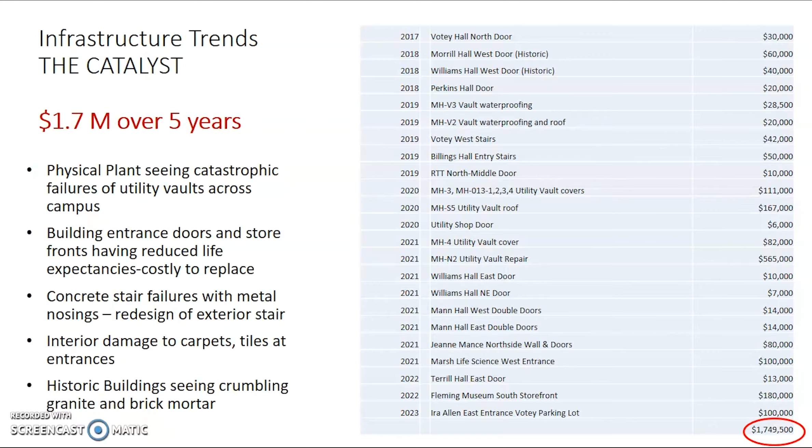We know from the New Hampshire Department of Transportation that salt has been used on roads to lower the freezing point of water and therefore minimize the formation of ice on roads and other surfaces since the early 1940s. The challenge is that when we put salt, which is sodium chloride, on the roads, it can run off and have impacts on the environment.

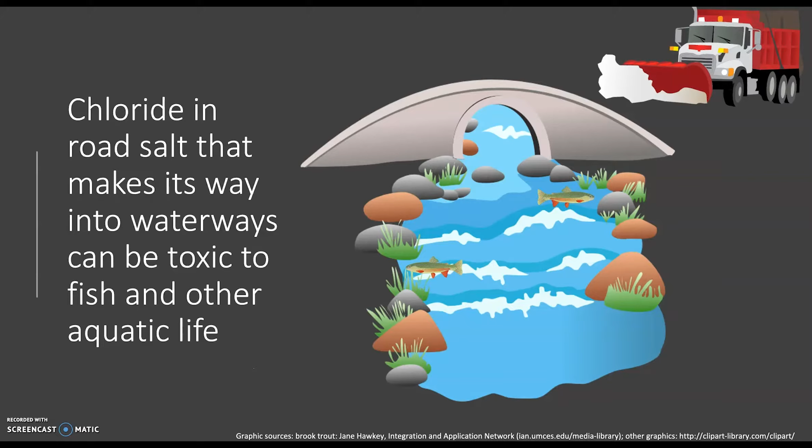For instance, if sodium chloride gets into surface water bodies, it can actually reduce the reproduction ability of fish or other aquatic life, and it can also kill them at certain higher levels.

We also know that chloride entering lakes can affect natural lake processes. It's going to sit on the bottom because that salt is more dense than the fresh water, and it can inhibit normal cycling or mixing of the lake.

Here in the Lake Champlain Basin, we know from research from the AuSable River Association, from Brendan Wiltse, that Mirror Lake in Lake Placid has been salted because of that urban community. The salt actually runs down into the bottom of the lake and forms a salt wedge at the bottom, which is rich in chloride, low in oxygen, and that means the fish stay up above.

In a normal spring situation, mixing would happen from top to bottom. When the ice is going out, there would be enrichment of oxygen again to the bottom waters. However, what Brendan has found is that because of the salt wedge at the bottom, full mixing of the lake doesn't happen, and that means low oxygen levels stay at the bottom and the fish therefore stay higher up.

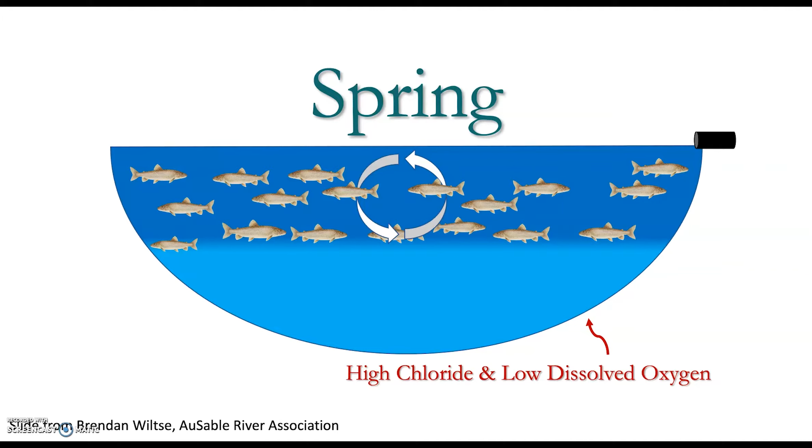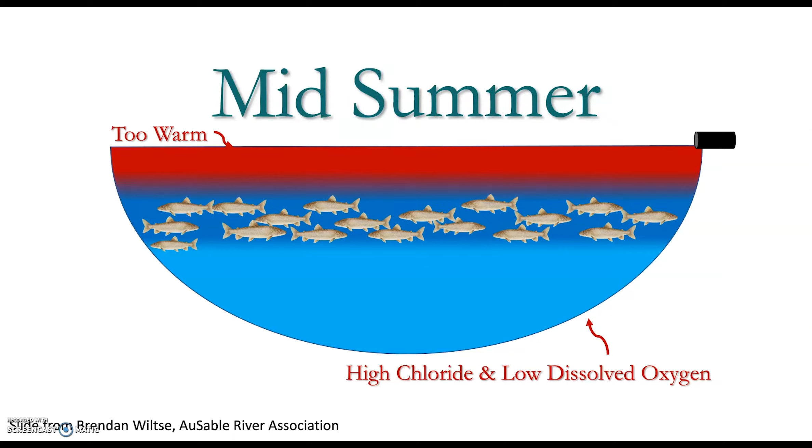This is okay until you get to summer, when the top waters start to get very warm, and warm waters hold less oxygen than cold waters. As the summer goes on, the fish are squeezed more and more into a narrow band of the lake, again as a result of the salt having been put there in the winter.

Other impacts of salt on the environment include running off into roadside areas and killing vegetation, as can be seen here.

Salt also can move its way into the soil. It can change the microbes that are in the soil, which can change how permeable or how much water that soil is able to hold. It also can cause the release of any toxic metals that might be in the soil, possibly as a result of cars or other inputs from the roadways.

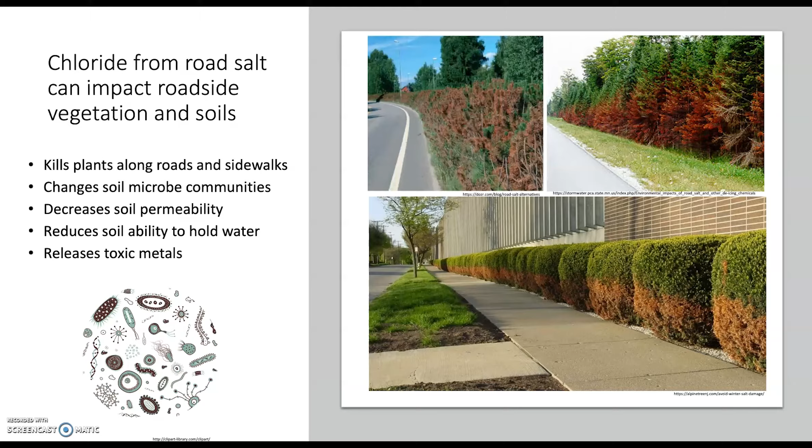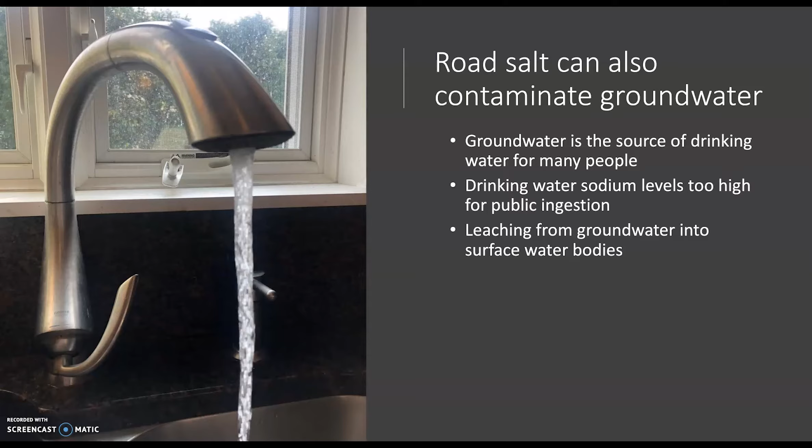Salt also can get into groundwater, and a number of people are using groundwater as drinking water. In this area, we know that there have been contaminated wells, and sodium chloride is our road salt, so the sodium levels can be impactful to people who have high blood pressure or other dietary restrictions or health concerns. Having groundwater contamination is a challenge.

In the Lake Champlain watershed, the area that drains into Lake Champlain, we know that chloride has been increasing for at least the last decade. On this graph from the Lake Champlain Basin Program, we see chloride on the vertical axis and time on the horizontal axis, and you can see that from about 2011 or so, we've seen increasing concentrations of chloride in the lake.

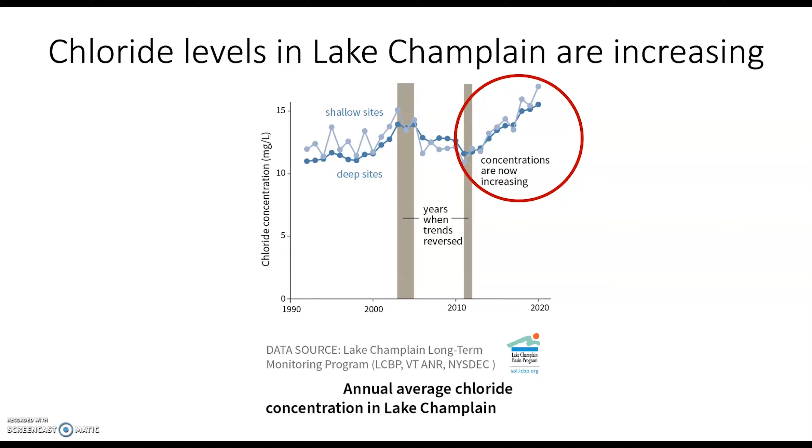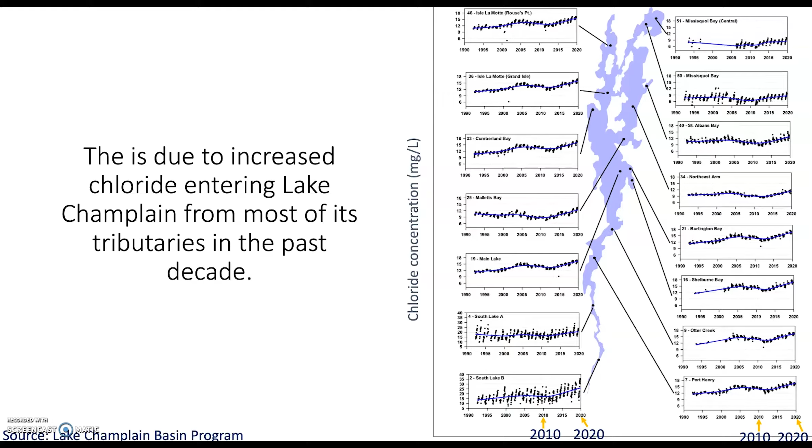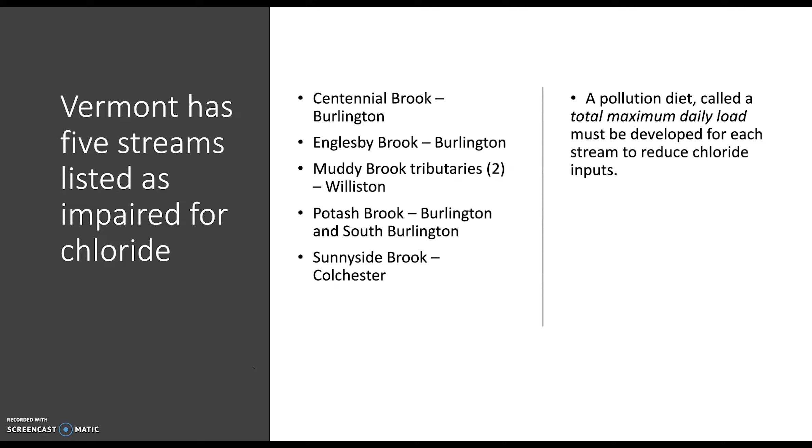We know that Vermont has 5 streams listed as impaired for chloride, meaning those streams need what's called a total maximum daily load, or pollution diet, to determine how we will reduce chloride entering those water bodies to protect them and the aquatic life within them, as well as human connections through drinking water. Most or all of these streams are within the Burlington area, and 2 of the streams drain parts of the UVM campus.

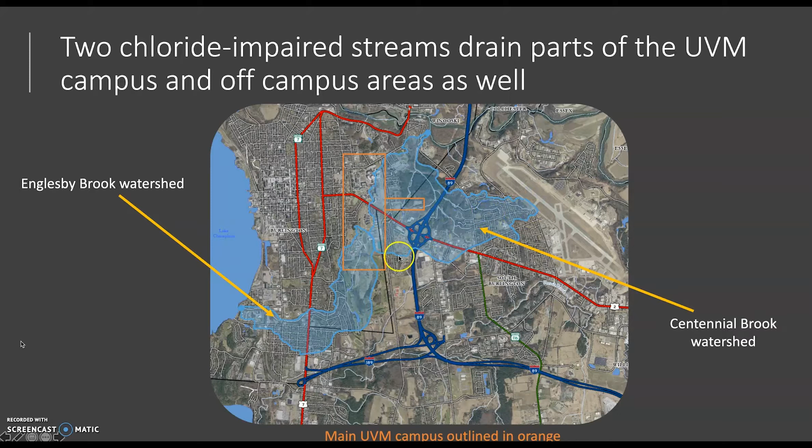Englesby Brook drains the southern end of campus, shown in the orange rectangle on this map, and Centennial Brook Watershed drains the eastern part of the campus. But I want to point out that campus is not the only contributor to these streams, and therefore not the only contributor to the chloride concentrations being observed. For instance, in Centennial Brook Watershed, I-89 runs through that watershed, a main thoroughfare into the city of Burlington. We also have the edge of the airport at the headwaters of that stream. So UVM is one of the contributors, but not the only contributor.

I'm going to talk to you about the financial impact of salt application as it relates to our buildings. As you saw from the previous slides, there are dollar figures associated with the costs of implementing projects. Now I'll show you the physical pictures associated with what those costs look like.

The University of Vermont is a large campus located in Burlington, Vermont. Prior to COVID, we had a budget of about $16 million for deferred maintenance. But with all the budget reductions during the pandemic, we are currently budgeted at about $6 million in deferred maintenance, which is not a lot when there are so many buildings and funds shared for things like roof replacements, mechanical systems, electrical upgrades, and life safety upgrades.

It really hurts to use these limited funds to make repairs that result from salt damage. We would prefer to build a project that will have a 15 to 30 year life. The above-ground building items that tend to be the most costly are the entrances, the storefronts, stairs, metal doors and frames, and masonry.

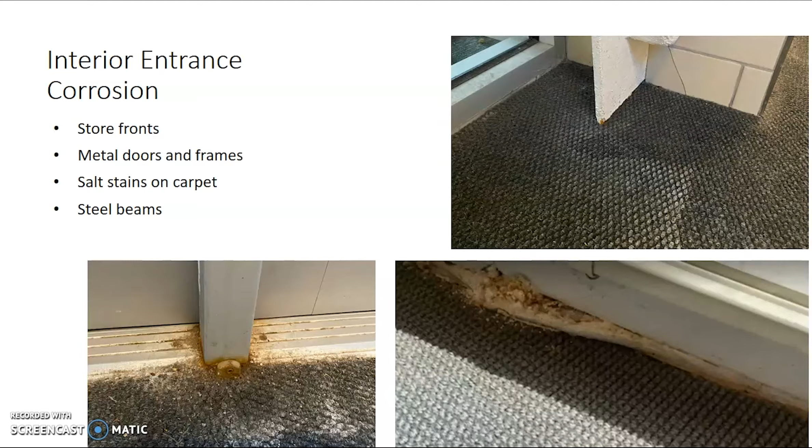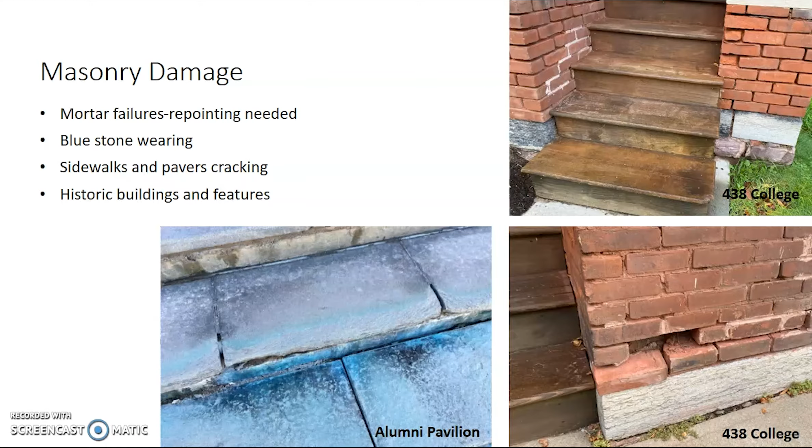The pictures really tell the story of the damage we see from salt. This area is the entrance to our new central dining facility, turned over to us in 2017. We are seeing corrosion on steel beams, mullions, and just about everywhere the carpet abuts the metal. Notice how quickly the damage begins to happen. But it's not just the metals where we see damage—many locations across campus also have failing mortar and stone on projects less than 10 years old.

We have a lot of historic buildings across campus as well. This is our Williams Hall, which I show in larger photos for reference, but then narrow into the granite pillars at the entrance. Notice the disintegration happening to the pillars due to the salting of the entryways. Our hope is that we can find sealants or maintenance strategies to eliminate further degradation.

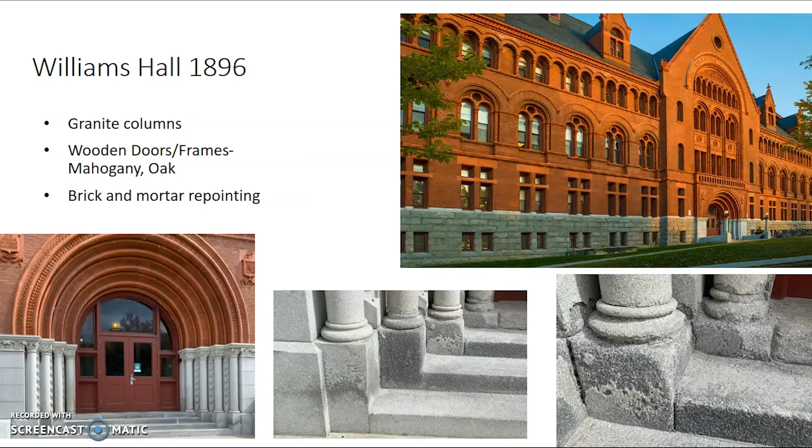Our doors are another obvious area of failures due to salt, and you'll notice it's only the bottom 12 inches of the frames and doors showing this rust and corrosion, again indicating this is a salt problem.

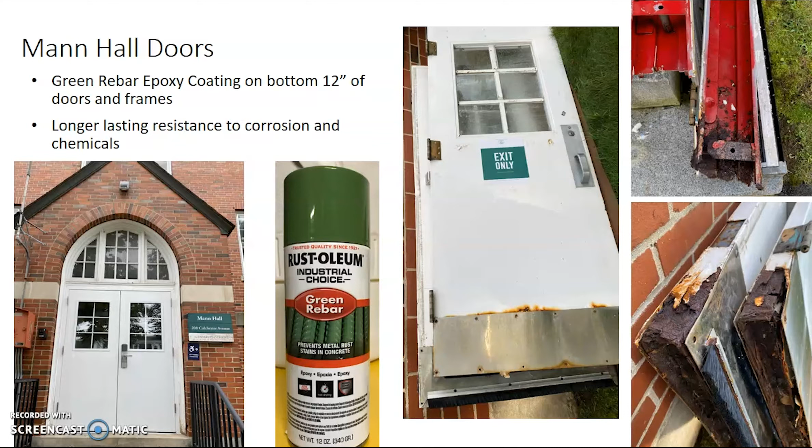This is a picture of our Mann Hall doors recently replaced. These are newly installed, but you can see the rusted areas of the old doors. Our latest approach is to coat the bottom 12 inches of the doors and frames with a Rust-Oleum product that is an epoxy-based primer.

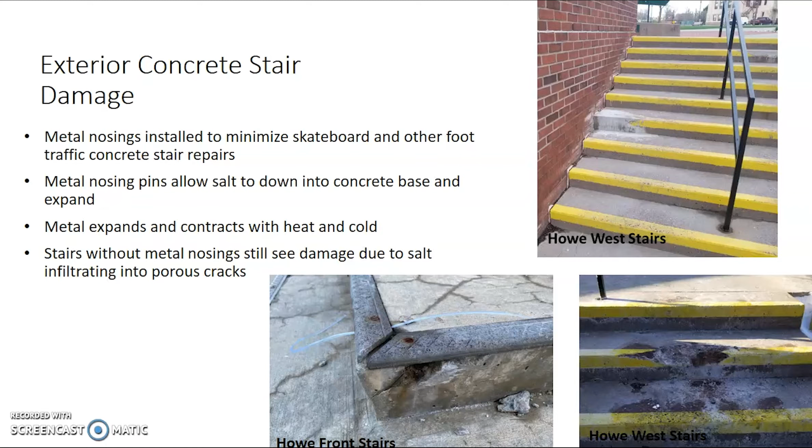For above ground issues, our stairs see the most damage. The university's original design included a metal nosing, but due to freeze-thaw cycles, expansion-contraction of metals, and salt usage, the failures of these nosings are significant, and to date we have not found an easy repair. Our new stairs have gone back to previous designs without the nosings, but salt still finds its way into the concrete and reacts with the rebar. We are planning to include maintenance for sidewalk and stair sealant.

The previous slide showed the Howe stairs before construction. Now completed, these stairs incorporated our new design, eliminating nosings. We are hopeful that designs mitigating salt damage, better products, and more comprehensive maintenance techniques, coupled with technology changes and more innovative approaches, are on the horizon.

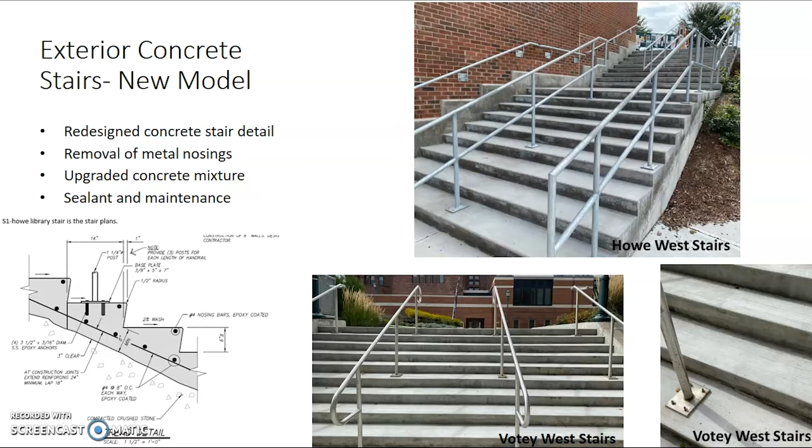Hello, my name is Kevin Sweeney and I'm a project coordinator with the university. I work a lot on the underground utility systems, and in particular I want to talk about our utility vaults and some of the salt penetration issues we're seeing with those vaults.

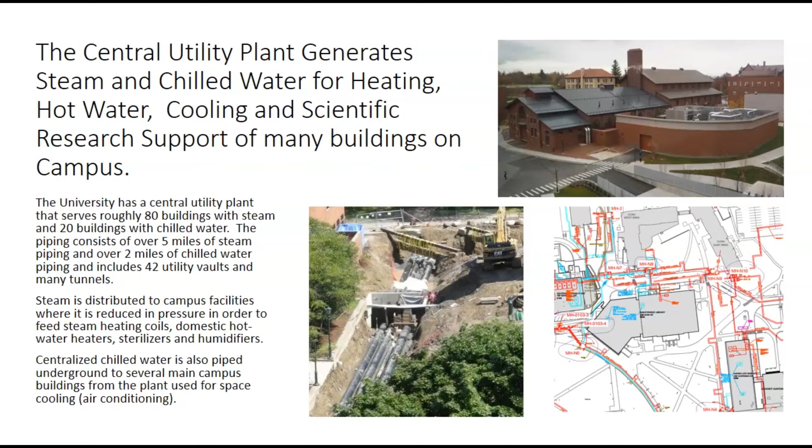For some background, we have a central utility plant that serves over 80 buildings with steam and 20 buildings with chilled water for heating and air conditioning systems. We have over 5 miles of underground steam piping and over 2 miles of chilled water piping throughout campus, and 42 utility vaults which house valve work, trap assemblies, and other equipment that maintain that distribution.

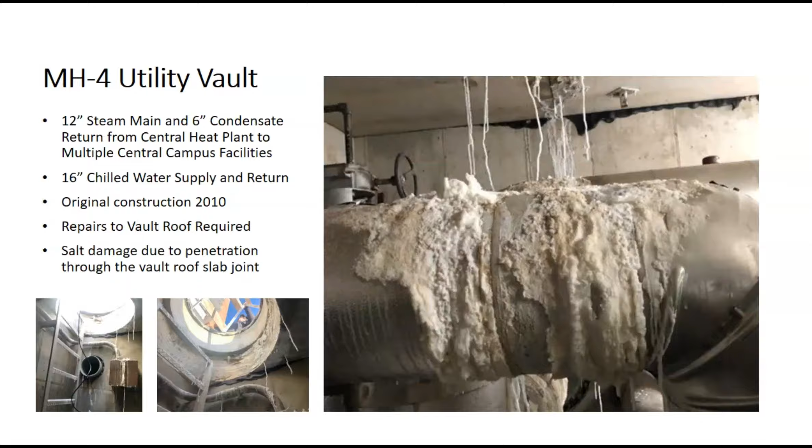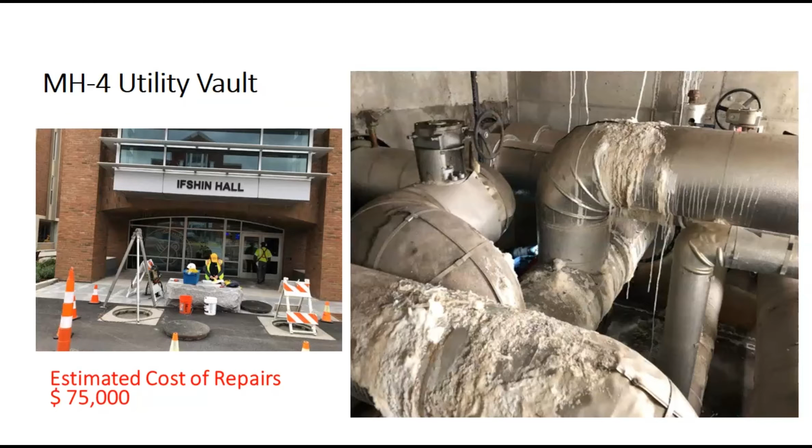Over the years, we've seen more significant salt penetration issues into our utility vaults. This is a photo of utility vault MH4, which supplies steam and chilled water to Central Campus. This has salt penetration through the roof seam as well as the manway, and has accumulation of salt anywhere from the steam jacketing to the carbon steel piping, the floor, and some of the electrical components inside the vault. This has some challenges with construction as it's located in a major roadway, and would need to have the roof slabs replaced and re-waterproofed.

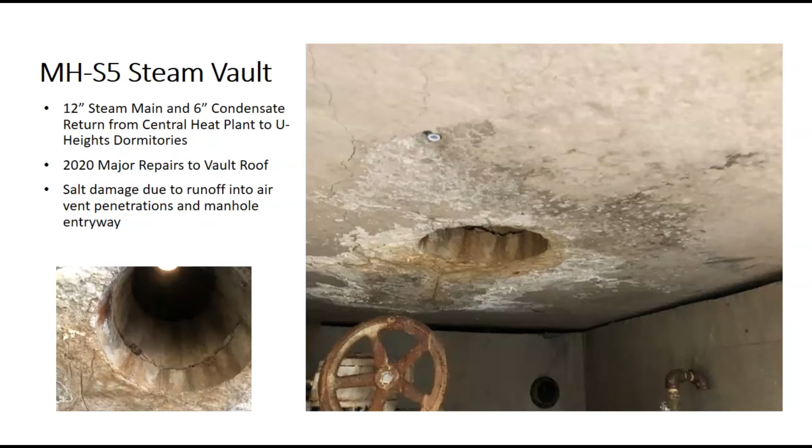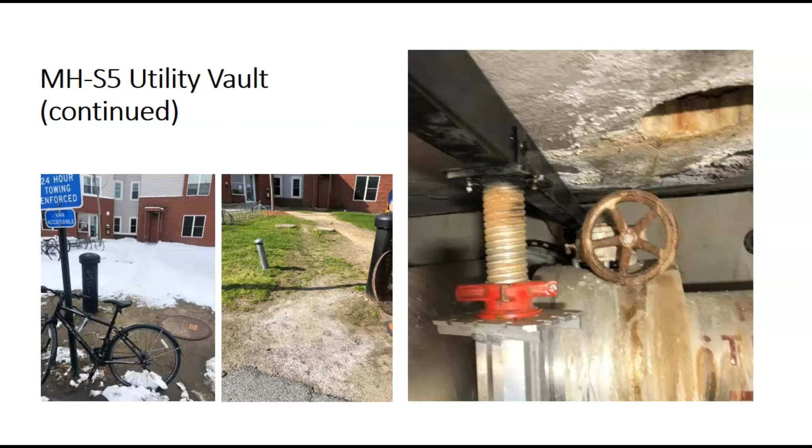Last year we noticed concrete spalling and cracking in MHS5, which is a steam vault that serves steam to one of our major dormitories on campus. After we took that photo, we noticed concrete falling down into the structure and worked with some of our local engineering consultants to come up with temporary shoring until we could make repairs to the vault. We ended up increasing the elevation and bringing the vents above grade so that runoff would not be an issue into the vault, and then waterproofing the vault itself.

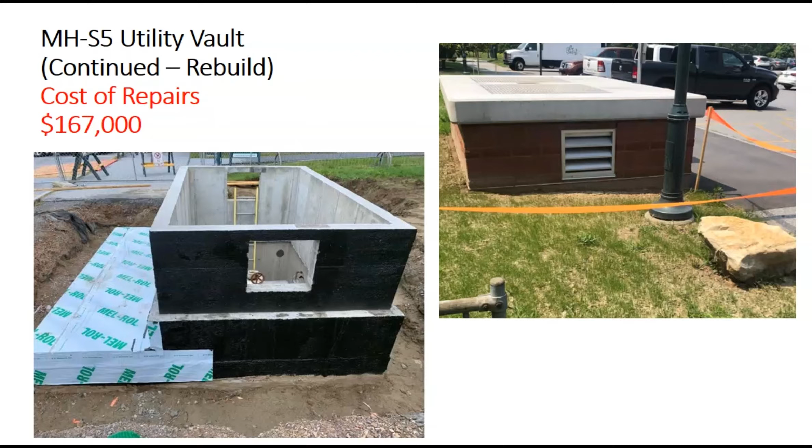All for a cost of over $167,000. We are currently under construction on our MH-N2 utility vault repair project.

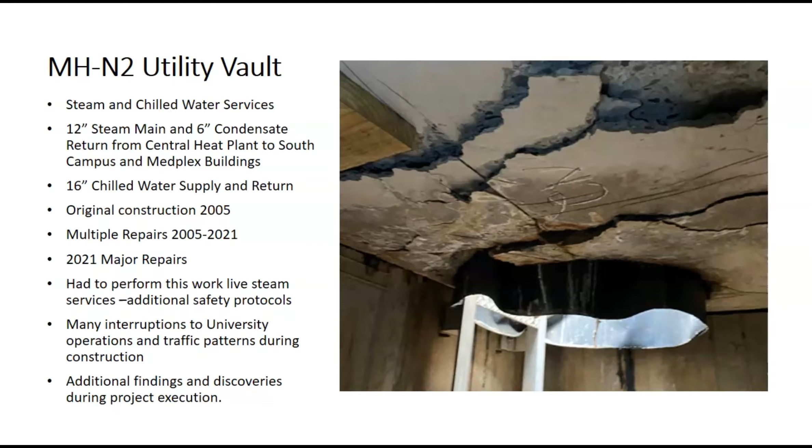This vault had significant spalling of concrete in the roof structure, which was located underneath the manway and a sidewalk above. After we noticed the spalling concrete, we used temporary supports and shoring to buy us time to seek engineering consultants and get project specifications and drawings completed for the repair.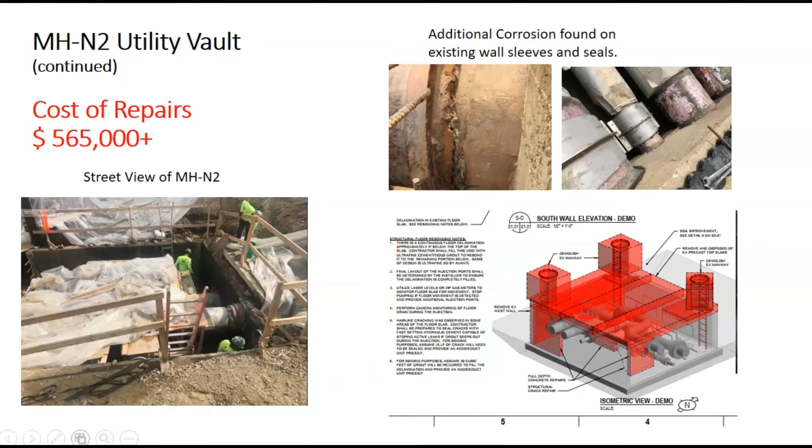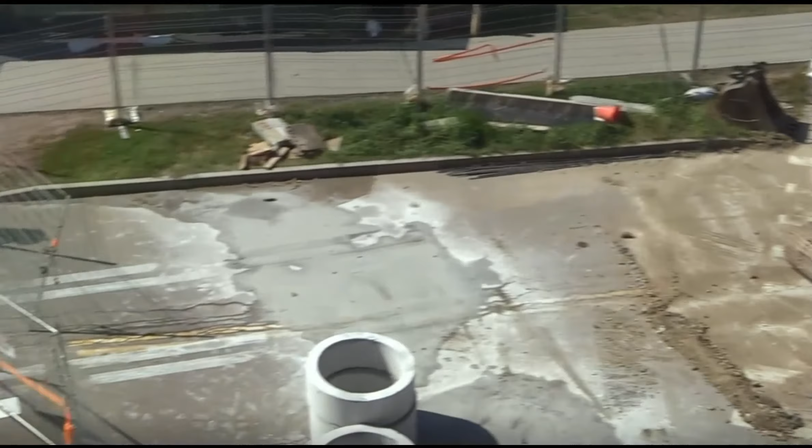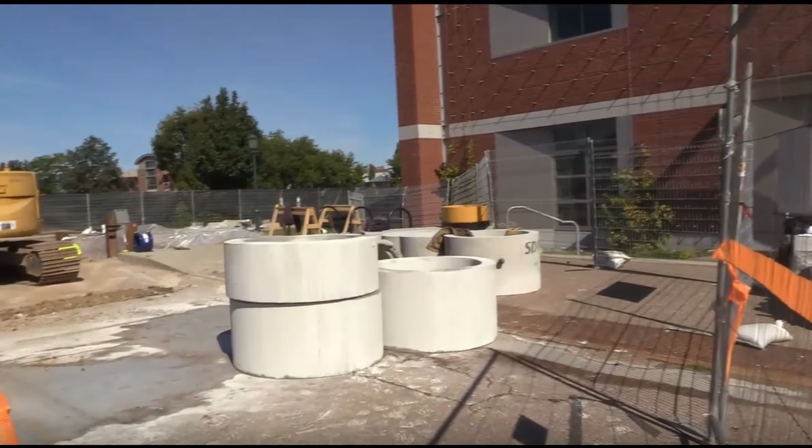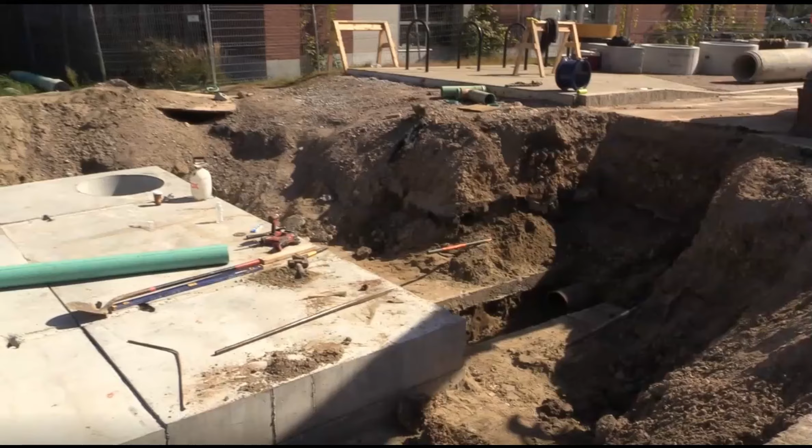The utility vault MHN2 repair project had a number of different challenges, from pedestrian access and minimizing blockading walkways, to emergency vehicle response access ways and conducting modeling for turning radiuses, to logistical challenges with removed access to loading docks, trash removal, and other delivery points on campus.

Another challenge was working with live steam. This is one of 42 utility vaults on campus and is really the hub between North and South Campus, so it's one of the most critical vaults on campus.

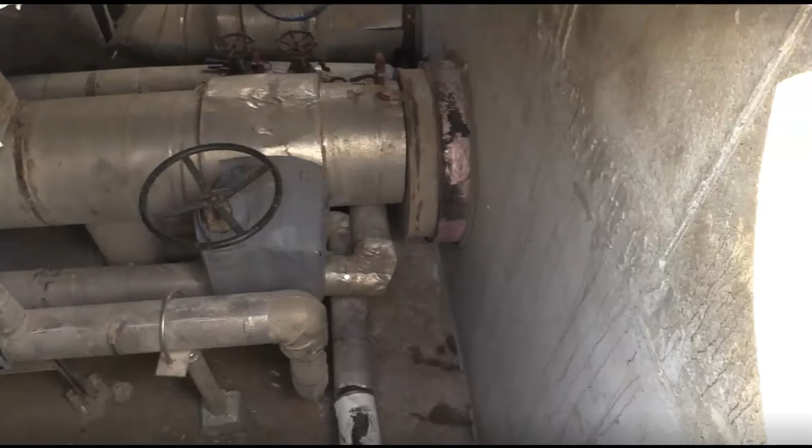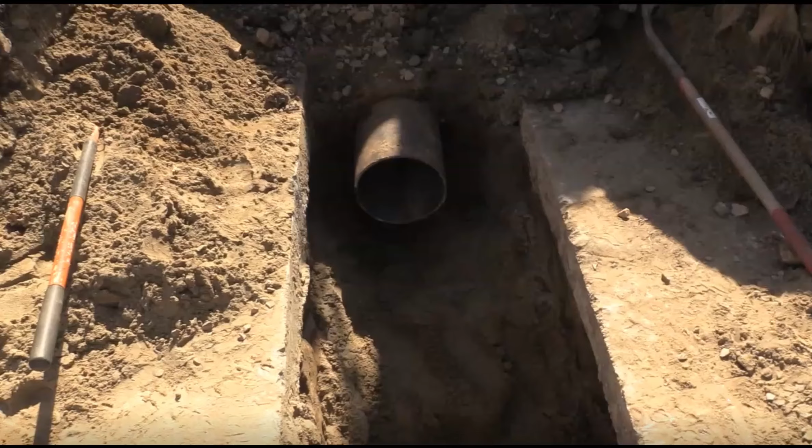Isolating the utilities prior to the project would be detrimental to the HVAC and heating systems, both on North and South Campus, so we really needed to keep this live while doing the construction. Access to valve work, maintaining thrust block anchors, and moving of equipment was critical to maintaining the system's operation.

The UVM Custodial Services team consists of 203 full-time employees. We are a very diversified staff with over 10 years experience on average and an average age of over 50 years old. We have 2 Kubotas, a Bobcat with a salter, and 14 snowblowers to service our larger areas. We're on call 24 hours a day during the winter months for a total of 20 weeks. We have no contractors. We service 116 buildings and 373 access egress sites to include porches and patios.

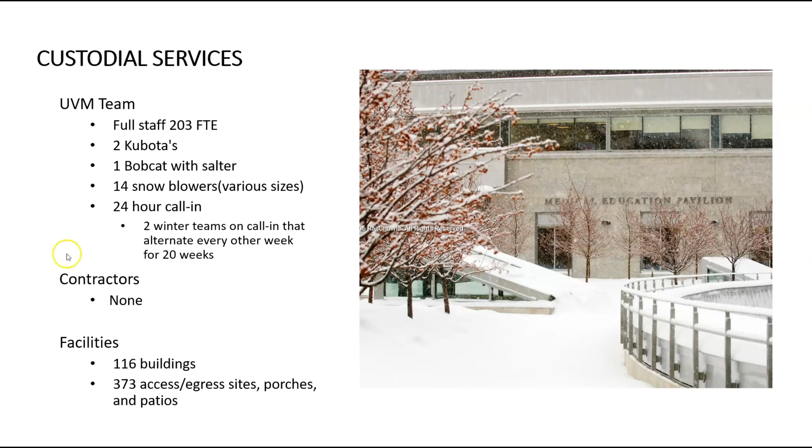Safety drives our response 24/7. Like grounds, we don't have a bare pavement policy. After a major winter event, our goal is to complete the clearing of all access egress points within 72 hours.

Proactively, we apply a de-icer, a potassium formate base. As a pretreatment, we use pump-up sprayers before the storms. This creates a barrier so that ice will not bond to surfaces. It is also meant for light accumulations of snow otherwise. We salt during snow events and during icing events. This is meant for accumulating amounts.

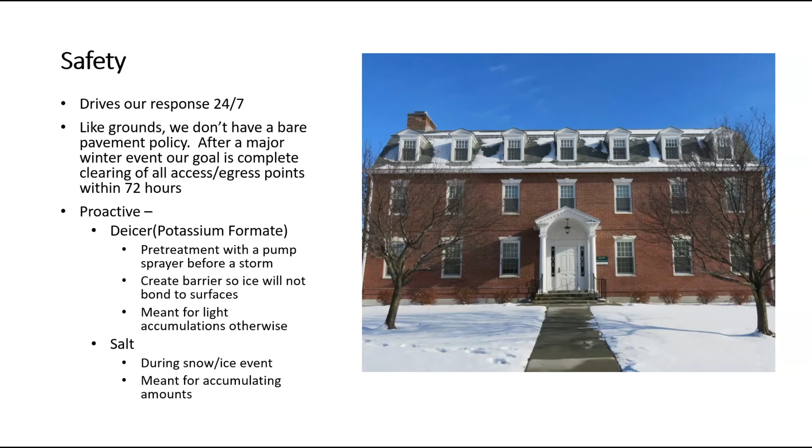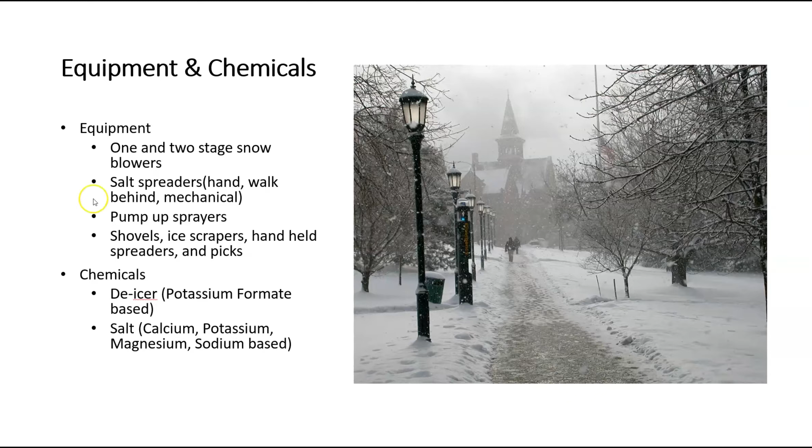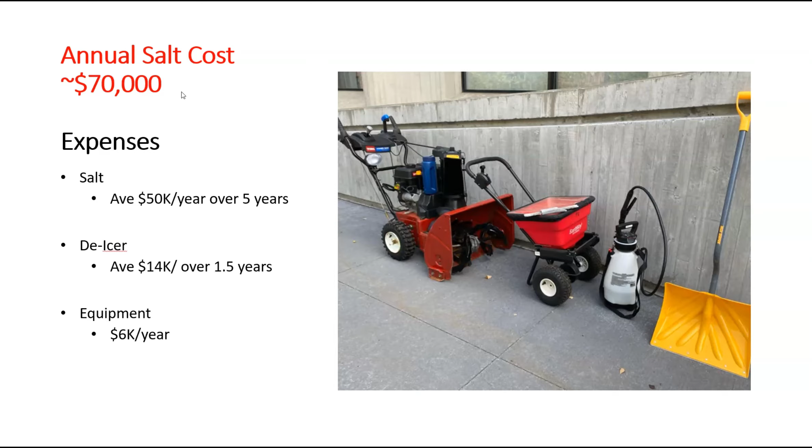Our custodial organization has annual equipment and supply budgeting of about $70,000 a year. We spend this money on salt, which has averaged us about $50,000 a year over 5 years, de-icer, which we've used for a couple of years and averages us $14,000 a year, and equipment, for which we are budgeted $6,000 a year.

Custodial has a variety of equipment for the removal of ice and snow. We have snow blowers, ergonomic shovels of various kinds, broadcast spreaders for salt, handheld spreaders for salt, and pump-up sprayers for the application of pre-treatments to prevent ice buildup. The equipment comes in various shapes and sizes. The idea is we want to make it as safe and easy as possible for our people to remove ice and snow from the facility.

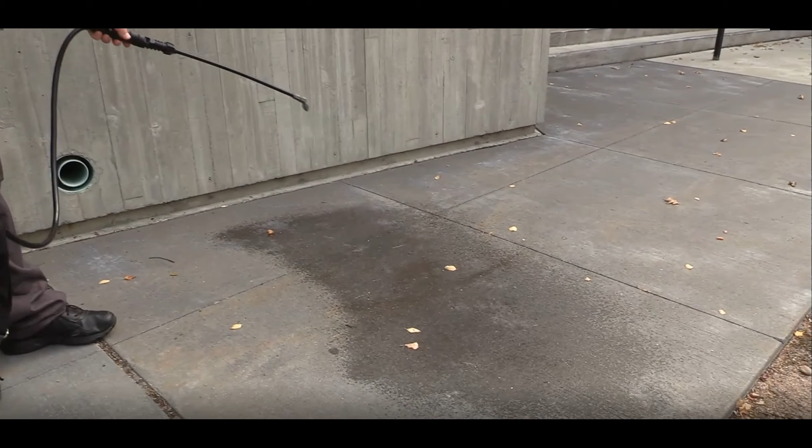The pump-up sprayer for the application of our pre-treat is critical. We began using this a couple of years ago. It's battery operated, it's lightweight, and can be used walking either forwards or backwards. The important thing is you maintain situational awareness. Here we see it in practice. Simply provide a nice, even coating. The concept is to provide a barrier that prevents ice from forming on the surface that you're applying it to.

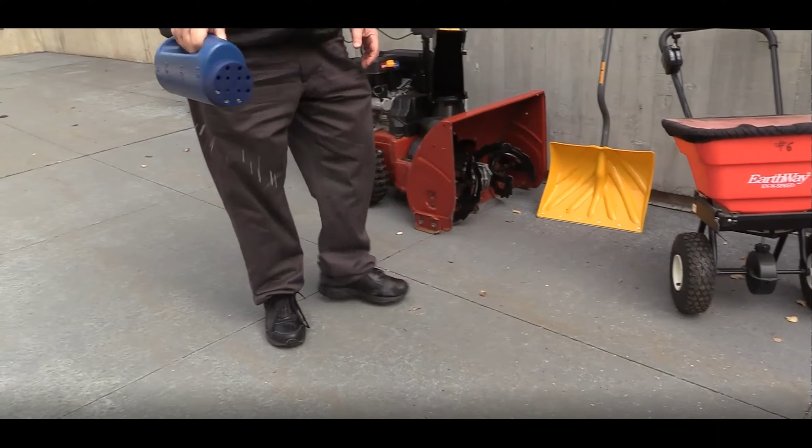The salt spreader, a handheld, is adjustable. Makes it much easier to control the volumes of salt that you're putting down, so you ensure that you're not piling it up. And it's really good around the doorways so that you don't get salt buildup and corrosion.

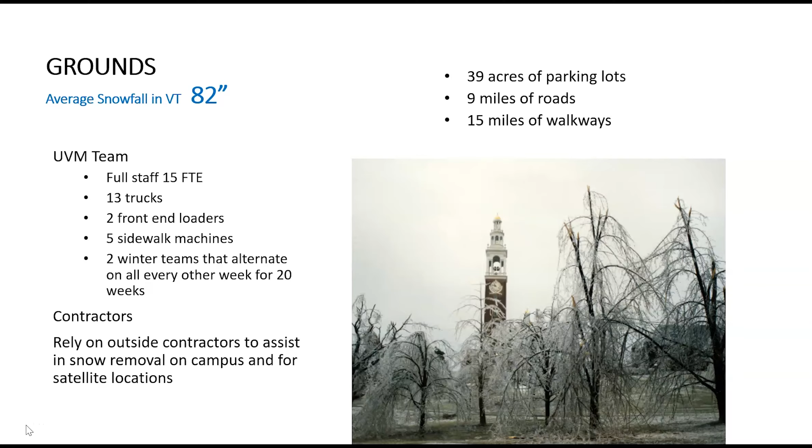As the slide says, safety is our top priority. We don't have a bare pavement policy per se, but have a goal of clearing our hard surfaces to mostly bare in a reasonable amount of time. As I said before, ice events are occurring more frequently in recent years, and this is a challenge for us because ice creates more risk of slip and falls.

We take a proactive approach to fighting storms. We watch the weather forecast carefully and schedule our crews to come in off hours when necessary.

Sometimes these storms coincide with athletic events, which raises our challenge to keep the campus safe, especially given the fact that many of our spectators to sporting events are elderly. We also have to react quickly, such as when we have a warm spell that melts snow onto the road surface only to refreeze in the middle of the night.

When storms are forecasted, we apply anti-icing liquid with magnesium chloride to our hard surfaces. The anti-icing liquid helps to break the molecular bond between the ice and the paved surface, making clearing off of it more efficient. Also, less salt is required.

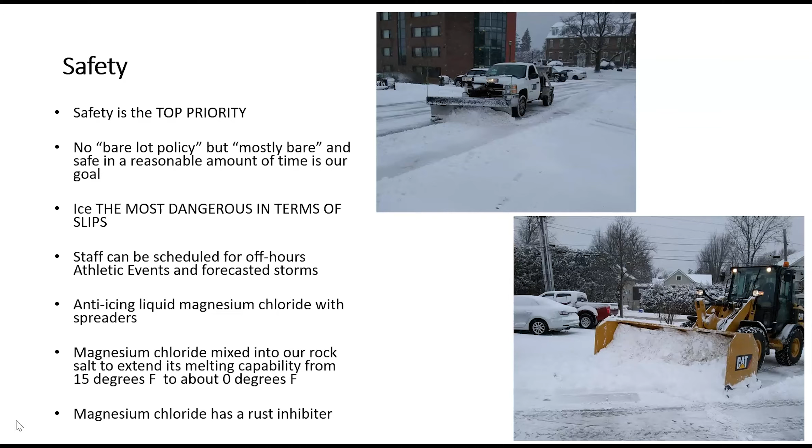Before we began anti-icing, we would have to rely on rock salt to melt the ice. We are confident that anti-icing has reduced the growth rate of our salt use. In addition to ProMelt, we apply a bagged magnesium chloride product to our parking garage instead of rock salt because it is less corrosive to rebar and other steel structural members of the garage.

To combat and reverse the trend of increased salt usage, we have invested in technologies that will help us to reduce and optimize our salt usage. This year, we purchased equipment from Hilltip and took advantage of a grant that is funded by a UVM student fee that the students put in place. The funding allows for student participation to study the equipment and report recommendations.

This year, we purchased a Hilltip truck-mounted combination liquid and solid spreader. It has the capability of spreading rock salt and any liquid de-icer. We also have purchased 2 Hilltip liquid spreaders for our sidewalk machines.

The Hilltip equipment has geo-tracking and the capability to predetermine the flow that is applied to a specific area based on the settings we choose. This helps take the guesswork and personal preferences of the operator out of the equation. However, the equipment operator has the option to blast the area with extra product if it is needed.

We are excited to begin using these products because we believe that it will help us to fine-tune our operations to a degree which we have not been able to do in the past, and it will pay dividends in terms of salt reduction, environmental benefits, and safety.

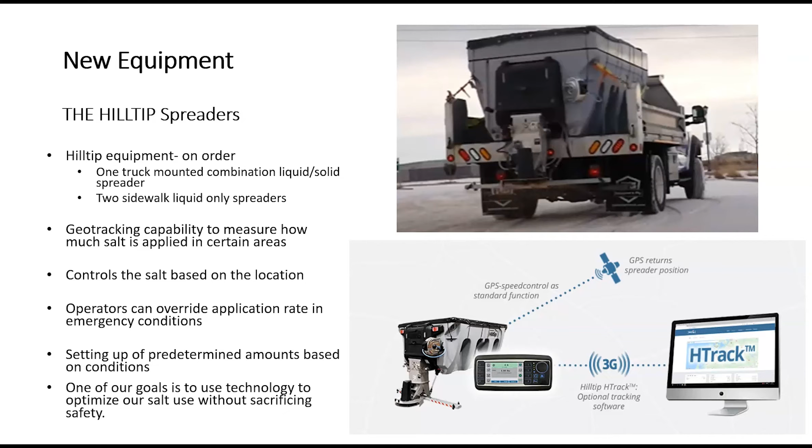Our annual salt use has trended upwards, we believe due to the increase in icing events, and costs us about $200,000 per year. It is one of the reasons, in addition to a desire to reduce impacts on the environment, that we are taking a proactive approach to salt reduction strategies.

We have 3 salt sheds. Each shed holds 300 tons, which when filled allows us to have almost half a season's supply on hand. We built the extra capacity to protect us from salt shortages, which have been a problem in past years.

We have 2 4,500-gallon tanks that we use to store a liquid magnesium chloride product, called ProMelt Ultra 2000 Inhibited, that our staff mixes into the rock salt. As the name suggests, it has a rust inhibitor added to the product. This is the same product that we use for anti-icing, with the exception that the liquid we mix with the salt has a dye added to it.

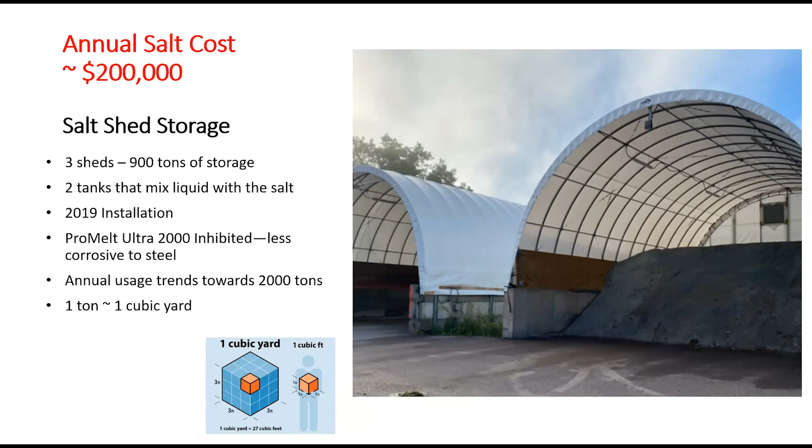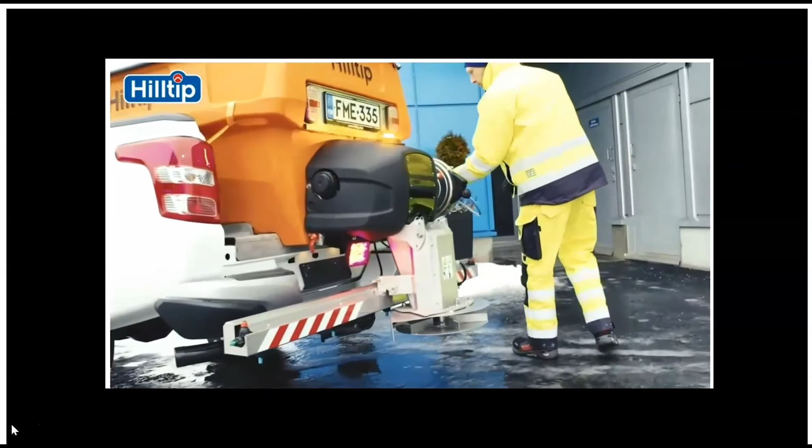Here is a quick video of our truck-mounted Hilltip combination liquid and solid spreader. As you can see, there is a hand sprayer that we can use for entranceways and stairs. Also, the nozzles can be adjusted for conditions such as snow depth. In addition to the capability of the unit to spread either liquid or solid product, it can pre-wet the salt as it flows from the spreader.

In the early 1940s, when salt was first used on New Hampshire roadways, about 5,000 tons of salt were used per year in the U.S. If you fast forward to 2015, about 20 million metric tons of salt were used in the U.S.

So how much is that? First off, there's 2,200 pounds of salt in a metric ton, and if we say each salt truck can hold about 10 tons of salt, that forms a traffic jam of salt trucks from Burlington, Vermont to Seattle, Washington, back to Burlington, Vermont, all the way to Glacier National Park. That's a lot of salt.

Stormwater treatment pond monitoring was necessary for us to quantify the impact of our salt reduction efforts. Our goal was to develop a water quality monitoring program for stormwater treatment ponds in the UVM watershed. This student-led monitoring program allows us to develop a baseline data set for water quality parameters in the UVM campus stormwater treatment ponds before the application of de-icing agents on campus.

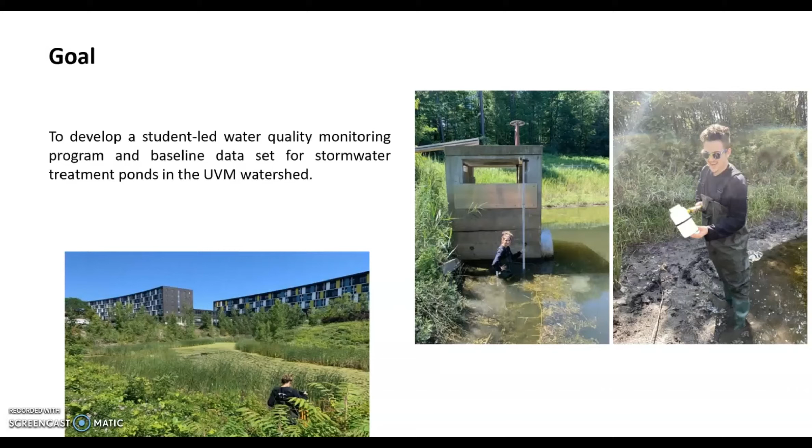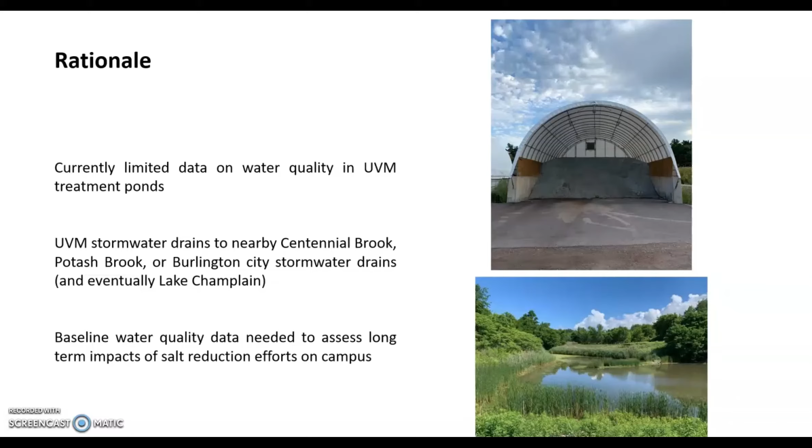The rationale for this part of the project is related to the fact that there is currently limited data on water quality in the UVM stormwater treatment ponds. Extremely high levels of conductivity and chloride have been measured in nearby Centennial Brook, which accepts the portion of water that drains from the retention ponds on campus and then drains to Lake Champlain. We believe that by collecting baseline data on chloride, conductivity, and other basic water quality parameters, we will be able to assess the long-term impacts of salt reduction efforts on campus.

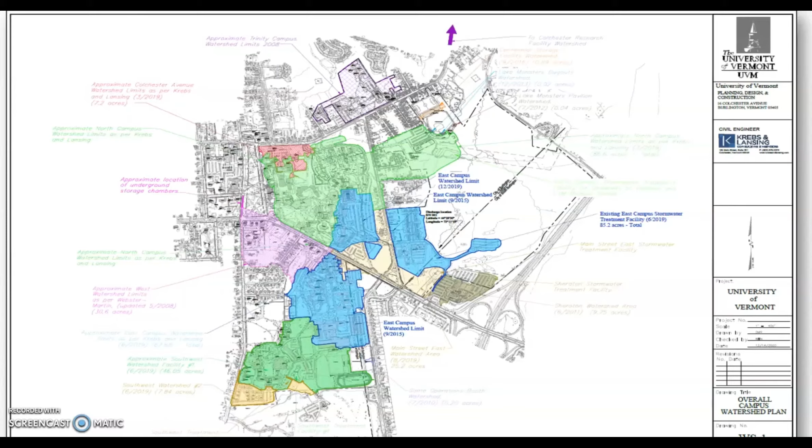A watershed map of UVM campus can be seen here. Our stormwater treatment pond monitoring included 5 of the 7 stormwater treatment facilities fed by UVM campus. Sites examined include Main Street East Stormwater Treatment Facility, East Campus Stormwater Treatment Facility, and North Campus Stormwater Treatment Facility, which feed into Centennial Brook, represented by the red line on the map.

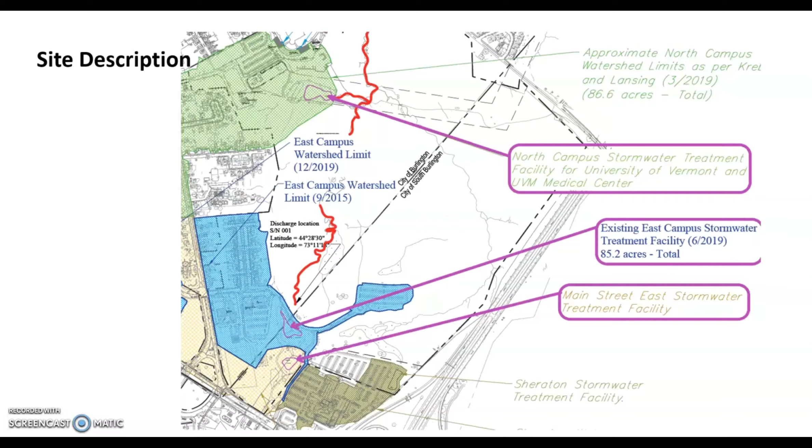Other sites include Southwest Stormwater Treatment Facility Number 1 and Southwest Stormwater Treatment Facility Number 2, which feed into Englesby Brook, which is located slightly south of these treatment facilities.

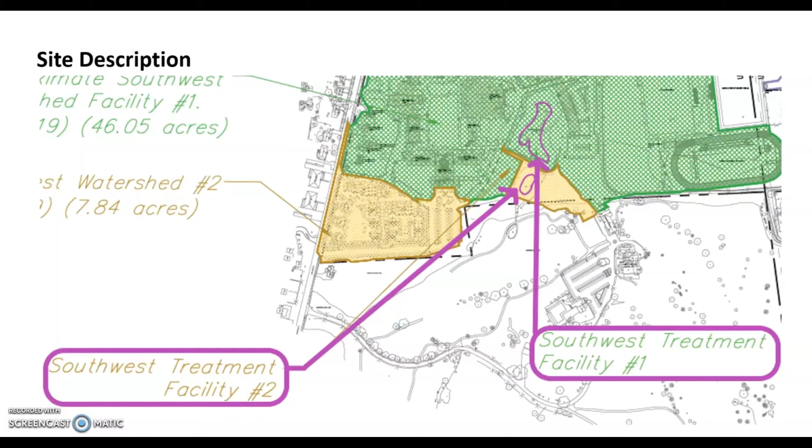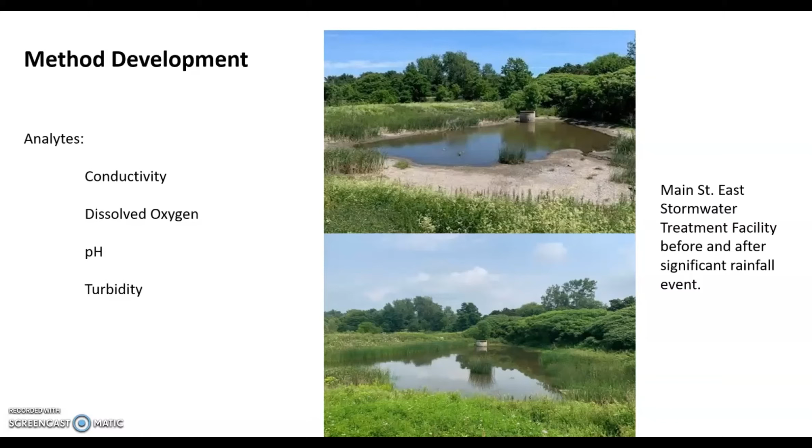Weekly monitoring of conductivity, dissolved oxygen, pH, and turbidity started on June 9, 2021 and continues to present date. Most sampling occurred within 2 days of a precipitation event. The impact of precipitation events in stormwater ponds is shown by this comparison of Main Street East Stormwater Treatment Facility's water level. The latter photo was taken after 2.64 inches of rain fell in a 48-hour period.

Samples were collected near the stormwater pond outflows in 500 milliliter HDPE bottles, first by hand from shore and then later using a 12-foot sampling rod. Samples were stored on ice and analyzed within 24 hours in the Environmental Engineering Teaching Lab at UVM.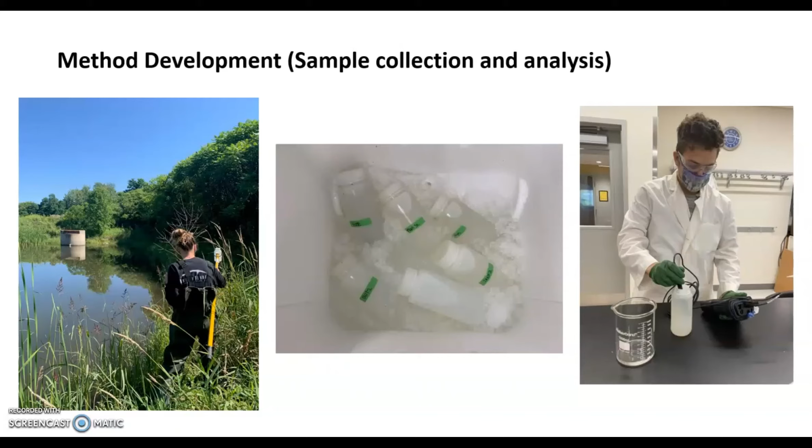Water level data was collected beginning July 20th, 2021 using a Topcon self-leveling laser level and receiver. We explored the use of staff gauges to measure water level, but couldn't find a consistent method of anchoring or attaching the gauge at outflows due to differences in pond outflow structures, substrate, shore composition, and depth. Various stormwater treatment facility outflows are shown here, including trash rack outflows and concrete structure outflows.

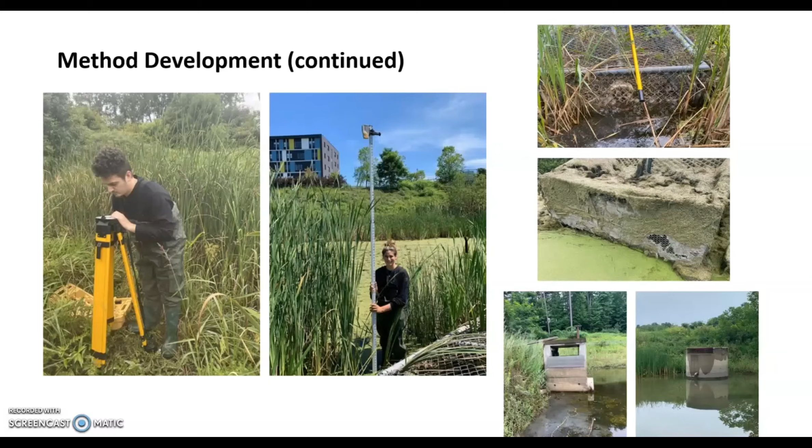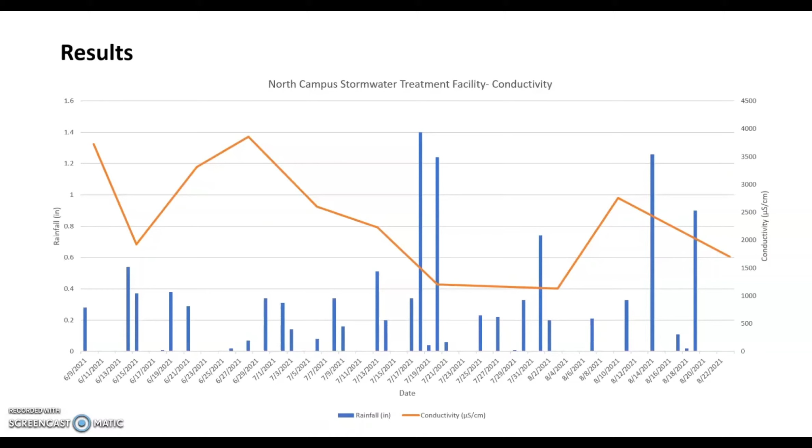Moving forward, we anticipate deploying high-frequency data loggers for collection of water depth, temperature, and conductivity. This will allow for continuous monitoring through the winter when accessing the ponds for sampling will not be possible due to ice. We plan on continuing weekly site visits to check on the deployed data loggers and collect samples for dissolved oxygen, pH, conductivity, and turbidity, so long as we can remain safe on the ice.

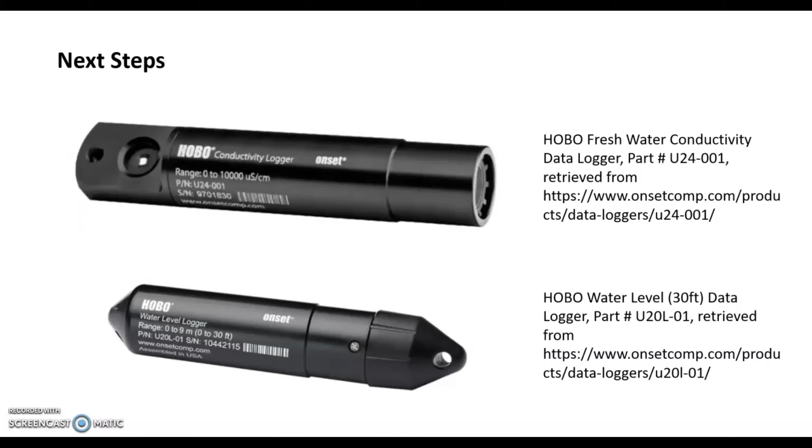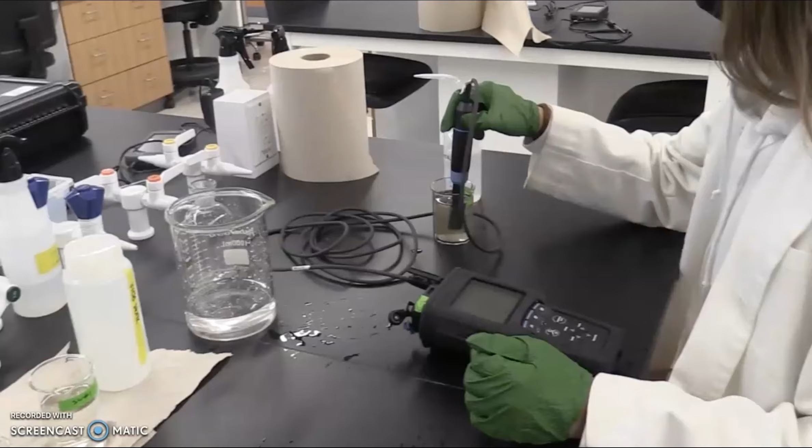This is me analyzing the dissolved oxygen of our stormwater samples in the Environmental Engineering Teaching Lab at the University of Vermont.

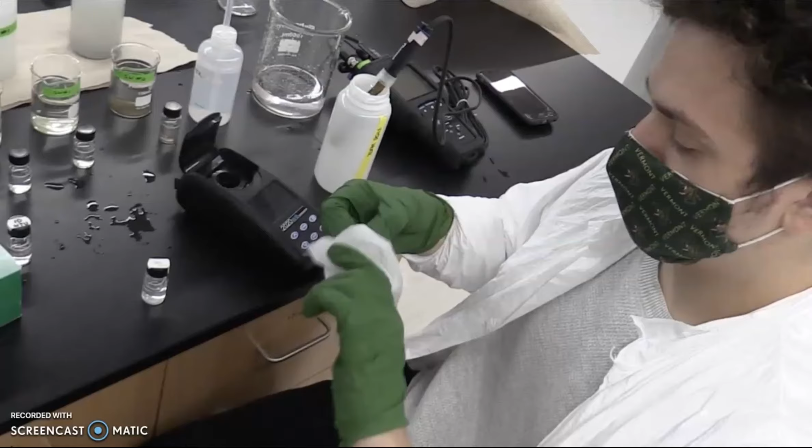Here's Robbie calibrating our turbidity meter. Samples were typically calibrated using a 10 NTU calibration standard.

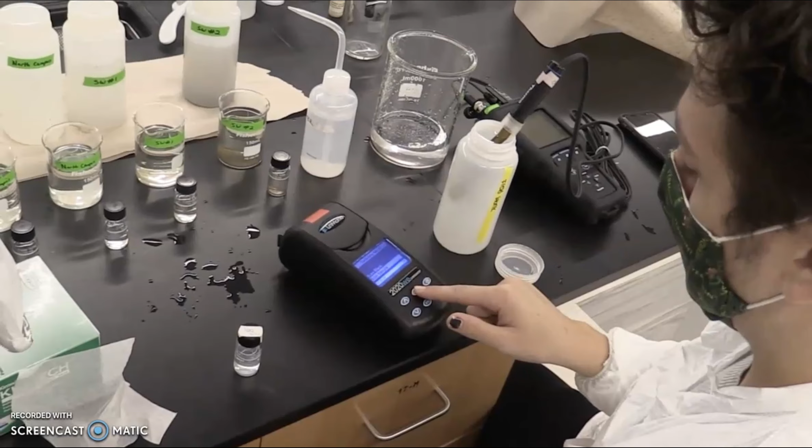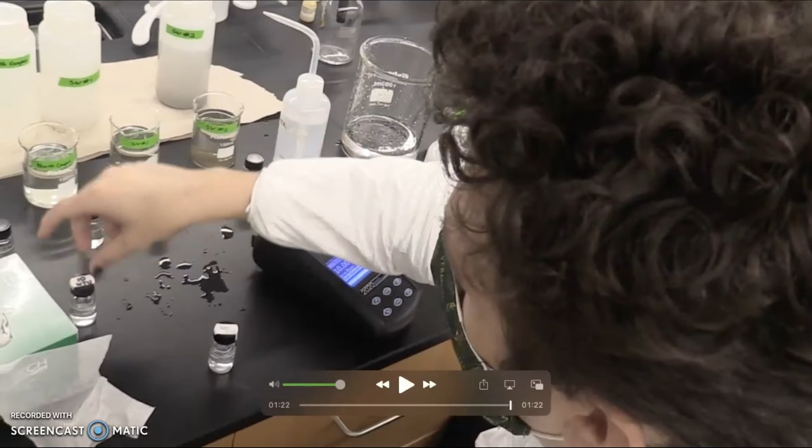The materials analysis aspect of this project also involves multiple directions of investigation by engaging students and faculty from our civil and environmental engineering program, with the goal of ultimately leading to design recommendations.

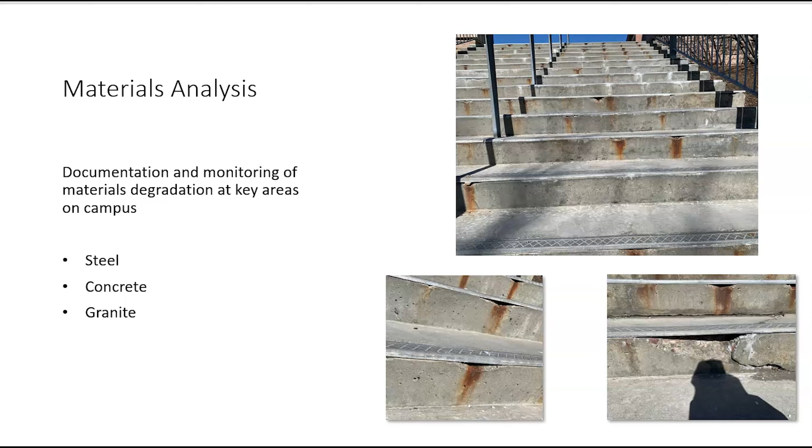In early 2021, we started with a student-based program of observing and documenting the exposed steel, concrete, and granite at steps, entrances, and walkways at key areas on campus which exhibited the most marked deterioration. Guided by the physical plant team, our undergraduate research student intern made site visits during the winter season to record and photograph conditions. We gained insights on the historical progression and extent of deterioration, such as pronounced scaling of the concrete and stone surfaces reaching progressively deeper into those materials, through conversations with the physical plant team.

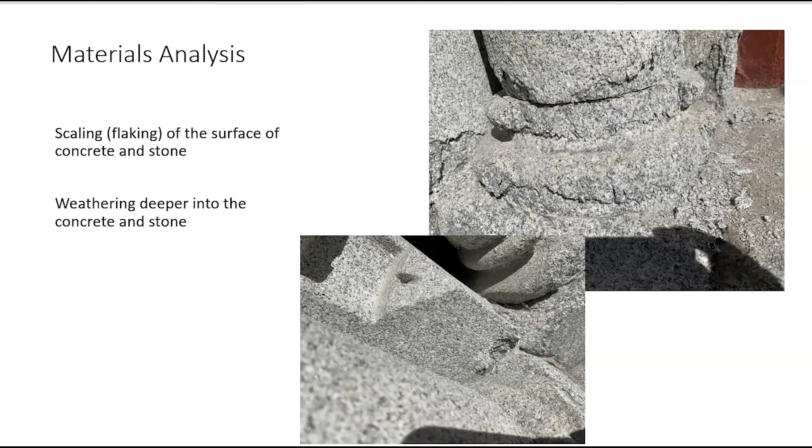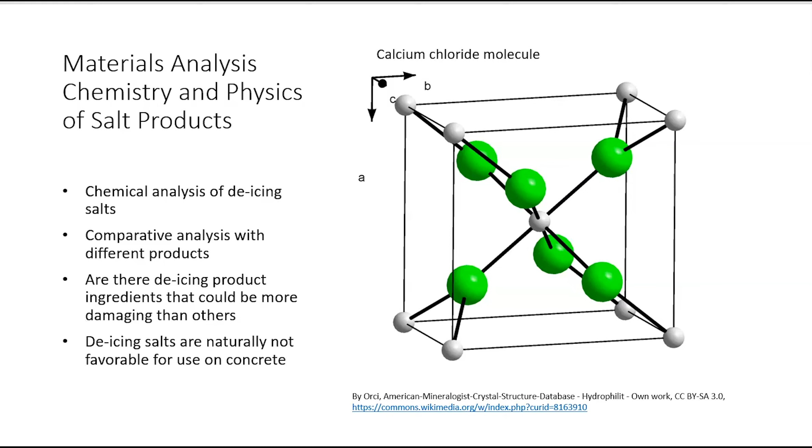Our investigation into the causes of the deterioration includes obtaining detailed chemical analyses of the de-icing salts. This is intended to identify if there are components in the salts which have more pronounced damage potential to the materials and environment.

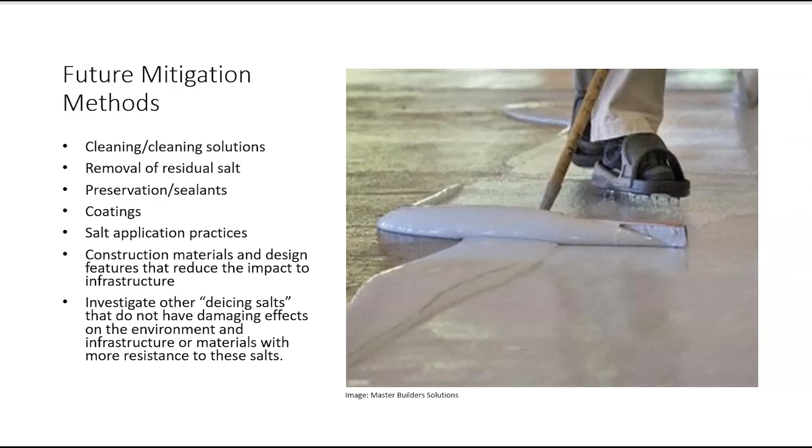Damage prevention, or at least reduction, from de-icing salts is going to require a comprehensive investigation into multiple approaches to mitigate damage resulting from de-icing salts. Avenues for mitigation include cleaning and removal of salts, protecting the exposed steel, concrete, and stone with coatings, alternative design configurations and materials, changing de-icing salt application practices, and using other de-icing products. The damage prevention is for both the exposed infrastructure materials and the downstream environments, such as the salts migrating into the soils and reaching the groundwater and surface water.

We have reached the conclusion of our presentation. We started meeting as a team January 5th of 2021, and we really feel this is the beginning of an adventure. We have a tremendous opportunity to make changes that impact our campus and the environment in a positive way. We are fortunate to have multiple disciplines able to tackle these challenges from many different angles, in essence, performing research with the campus being our laboratory.

We may be a newly formed group, just 10 months, but individually we bring a lot of experience to the table, and collectively our team approach allows us the ability of experimentation. As we implement a change, we can then evaluate the results through our sampling. We could even conduct 3 different experiments based on the 3 different areas on campus that feed the 3 stormwater ponds. Variance in salt amounts or a different product, coupled with engineered solutions, all possibilities in our laboratory.

For the very long term, we would hope that our approach gains traction and others will find alternative ways of melting snow and ice on roads and entrances, and also find other methods to mitigate damage to facilities and grounds. We have more goals, and we can share our executive summary, vision, and mission through a link we will provide at the end of the presentation.